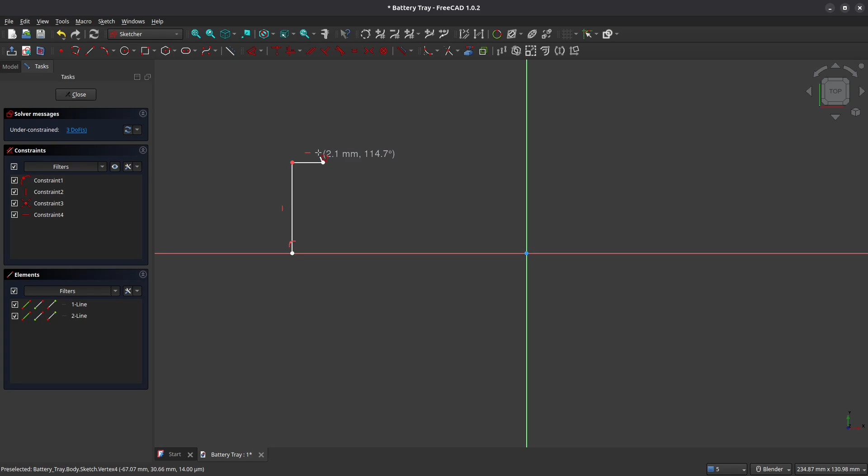Begin by creating a new body and a new sketch on the XY plane. And we're going to use the polyline tool, and we're going to map out one half of our tray just like we did in the previous episode. Now, this is going to have 4 tabs that we're building into this. The 4th tab is actually the retention ledge that will keep the battery from slipping out of the tray on one side.

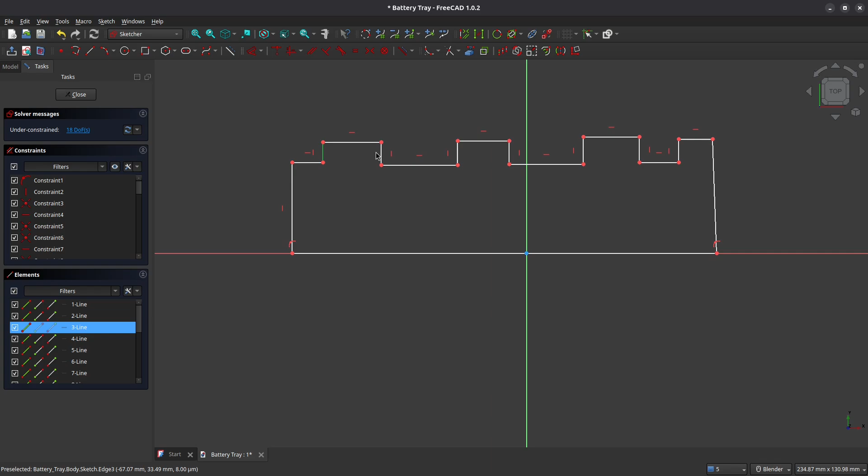As before, we're going to need to make sure that if any of our line segments weren't horizontally or vertically constrained, that we select them and we constrain them. There's another one there. Now let's set the height of the vertical edges on our tabs so that they're all the same, equal length. This one also needs to be constrained vertically. Now let's set the width of our tabs so that they're the same.

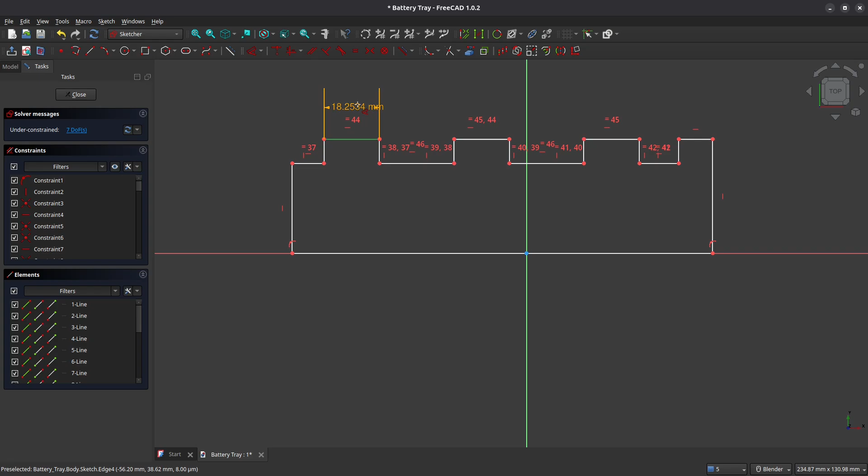The section between these 2 tabs is also going to be set equal. And now let's set the width of the tabs to 10mm. Let's set the height of the tabs to 3mm. Now this gives us a bit of a sense of scale of what this is going to look like. Let's set the distance here between our tabs to 22mm.

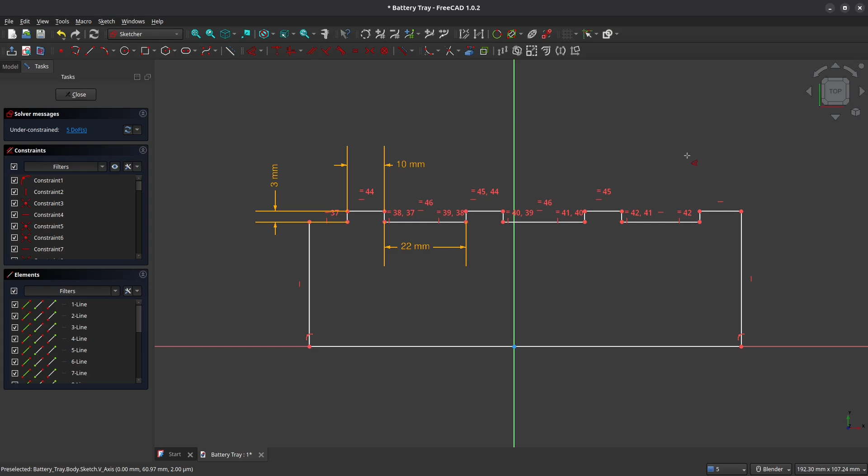I'm going to pull this out to about right here, and I'm going to pull this sidewall in here. And I'm going to set the width of this top tab here. This one is 9.8mm. I'm going to pull it in just a little bit like this. And now I'm going to set this bottom line so it is symmetric around the y-axis. And now I'm going to set the length of that line to 104mm.

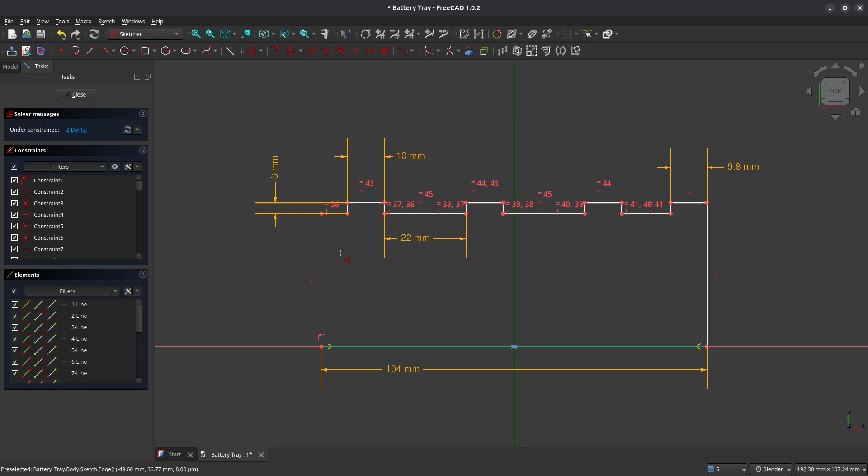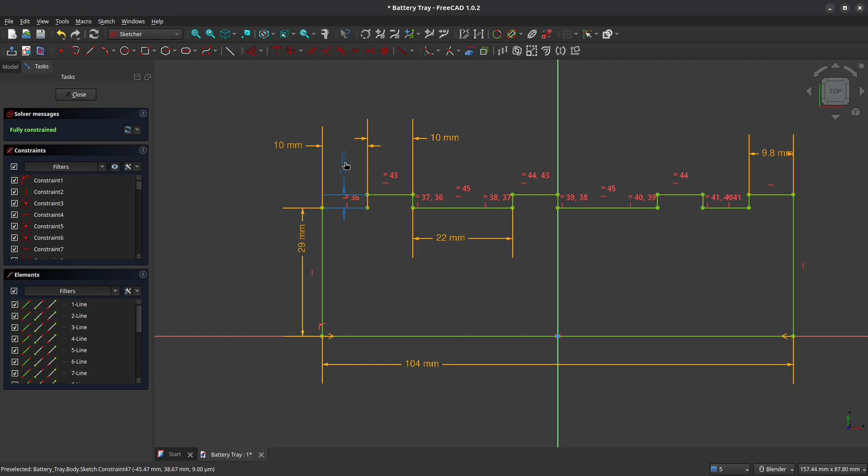Going to set the sidewall here to 29mm. And now we need to set the length of this edge right here. We're going to set this one to 10mm. Just make sure that we can see all of these constraints. And with that, we have fully constrained the outer shape here for our tray. So now we're going to close out of the Sketcher workbench, and we're going to pad this shape out. And we're going to pad that to 3mm.

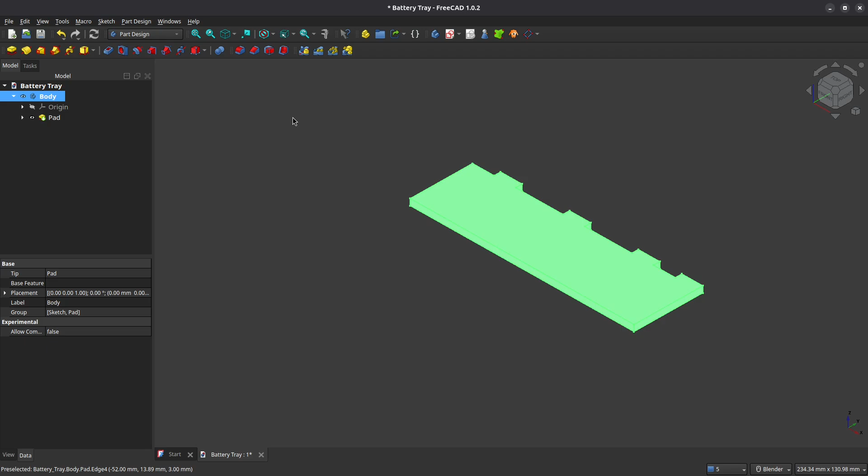And we're going to mirror this. So in the tree view, left click on the body, and we're going to mirror this shape. From the plane, we're going to select our own reference, and that's going to be this edge here. And we'll say OK. And now we're going to add the retention ledge on this side here. So let's create a new sketch on the top of our part here. And we're going to reference this edge and the inside parts of this tab.

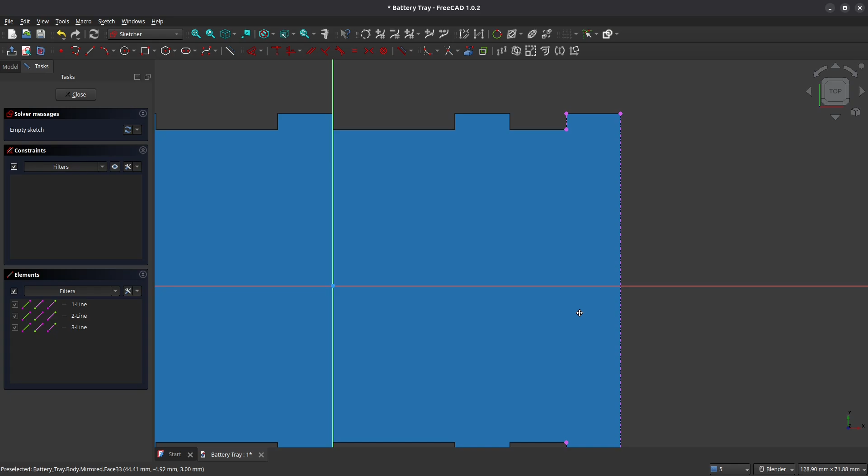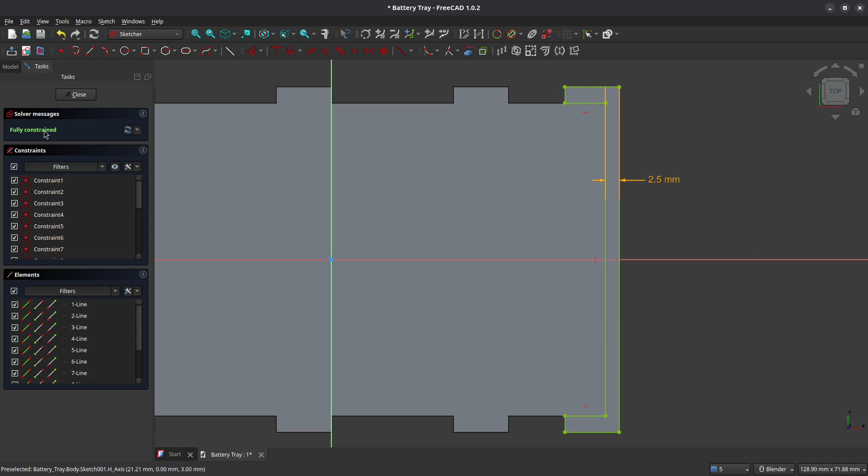And we're going to use the polyline tool. We're going to trace the outside, and then we're going to come back around the inside. And we're going to make sure that we've got our horizontal and vertical constraints in place, which we do. We're going to set this sidewall of our retention to 2.5mm. So our sketch is fully constrained. We can close out of this, and we're going to pad this out to 5mm.

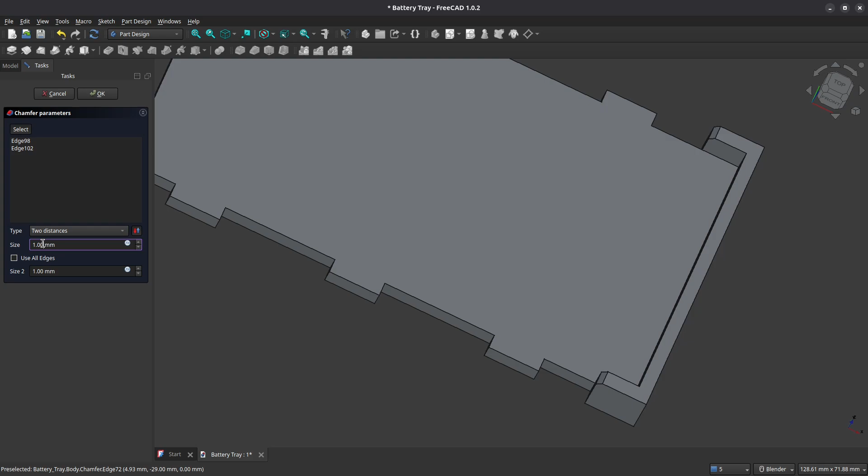And now we're going to add a chamfer on the edge here. So let's grab this edge here. I'm going to hold down Control, click the next edge, and grab that chamfer tool. We are going to choose the 2-distance type of chamfer. Our first size is going to be 7.3mm, and our second size is going to be 5mm. And when we do that, we get this nice even chamfer here. Extends from the edge downwards.

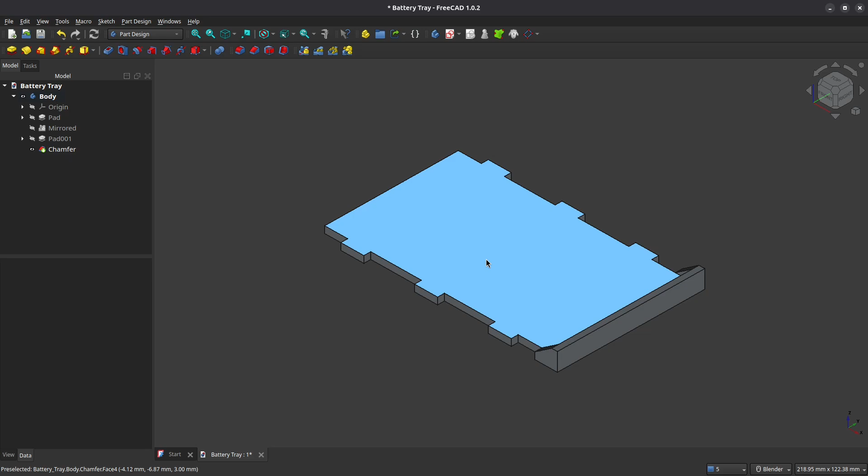All right, so now that we've got that, we're going to create the truss pattern here in the center. So let's create a new sketch on the top. Going to create our triangles using the polyline tool. And so just like before, we're creating these 4 triangles. And we're being symmetric in how we do this.

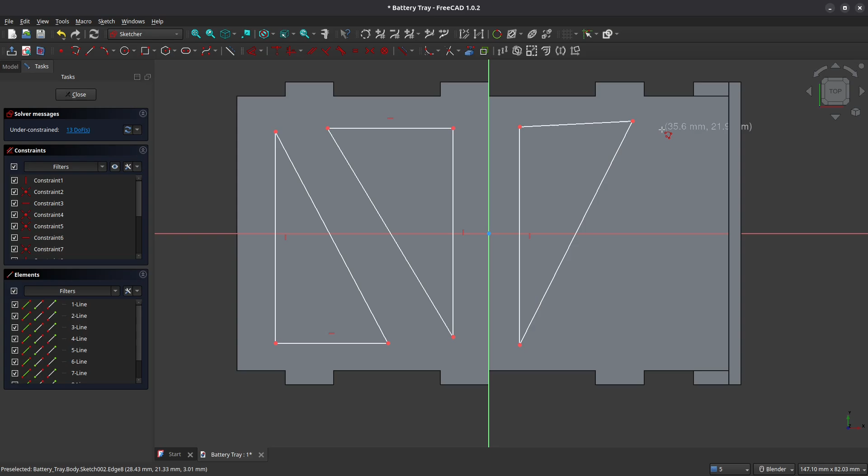We will take and fix any lines that aren't horizontally or vertically constrained here. So that one and that one are missing their constraints. So that solves that problem. Let's make these 2 inner triangles so they're symmetric around the y-axis. Let's take the base of all of our triangles and set them equal to each other.

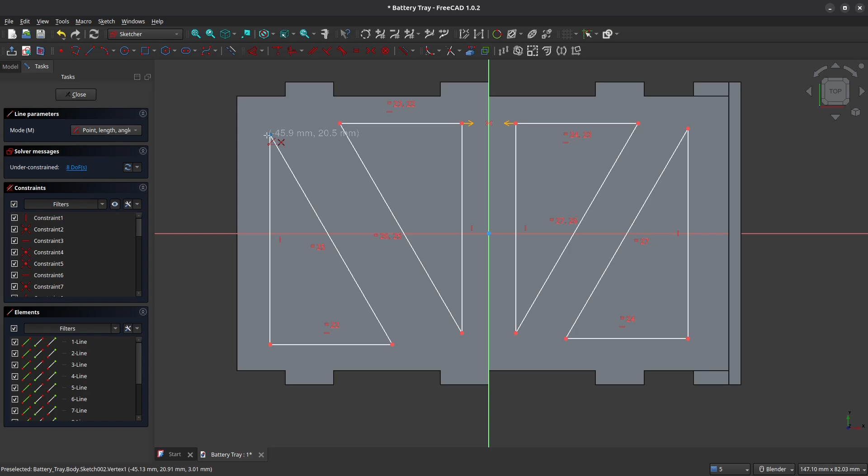And let's take the diagonal portions of our triangles and we'll set them so they're equal to each other. And now we're going to toggle on the construction geometry and we're going to draw construction lines between each of the triangles on the top. Finally, we're going to make sure that these 2 end construction lines are constrained horizontally. And we're going to click on each one of these construction lines and make them equal in length to each other. So now we can set the length of one of the construction lines to 5 millimeters.

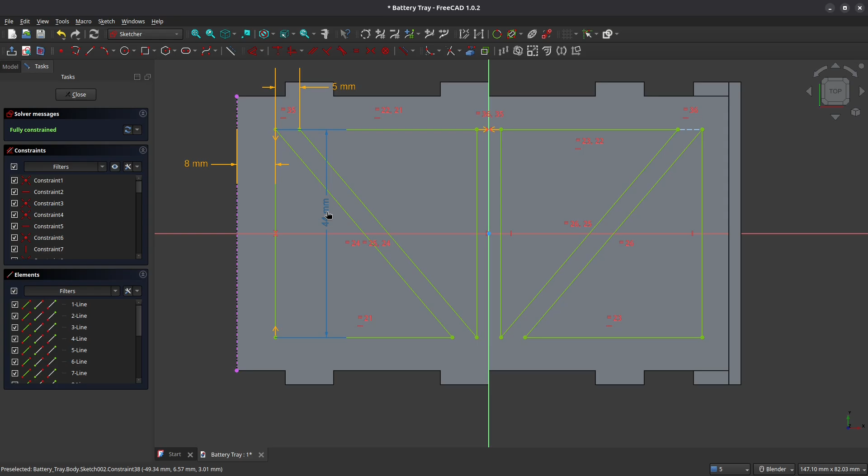We're going to set the height of the sidewall of this triangle here to 44 millimeters. And we're going to make this triangle on the end, we're going to make its vertical line symmetric around the x-axis. And that leaves us with 1 degree of freedom here, and that is going to be the distance away from the edge here. So I'm going to grab my external geometry tool, reference that side edge there, and I'm going to create an offset here of 8 millimeters. So our truss pattern is fully constrained now, so I can close out of that and pocket it.

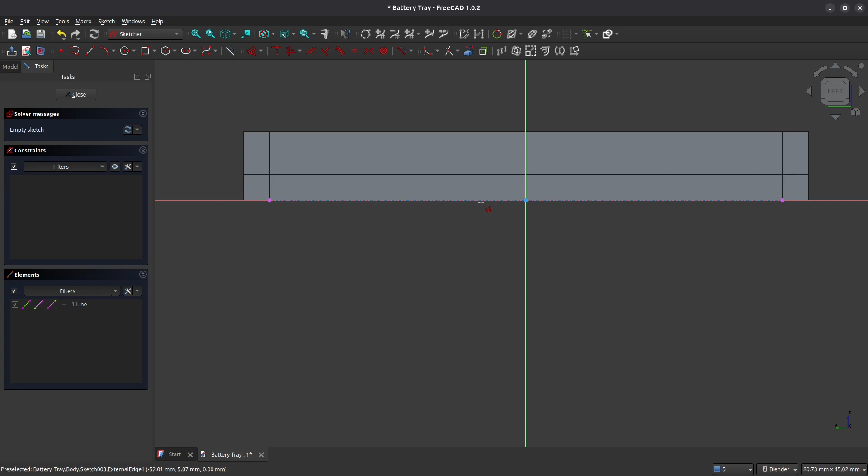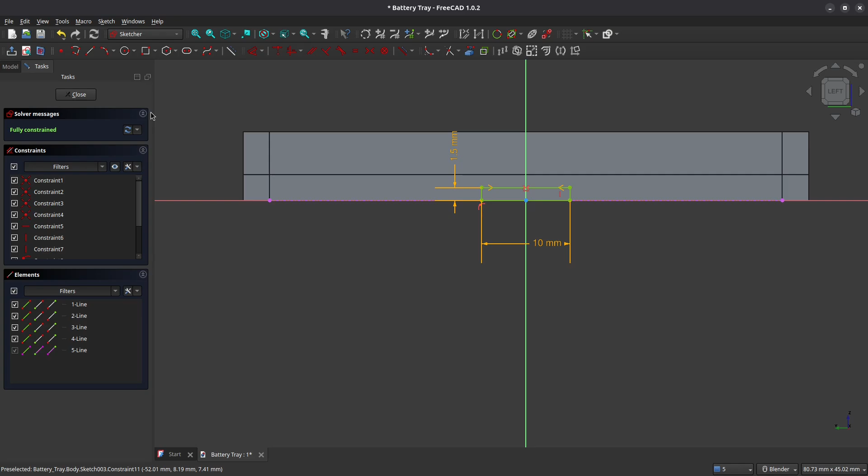And now we're going to rotate around to the front, and we're going to add a shape on the front here. This is going to be the compliant clip that will flex just using the natural flexibility of PLA plastic. So let's put that in there. We're going to make this rectangle symmetric around the y-axis. And we're going to set its width to 10 millimeters. And we'll set its height to 1.5 millimeters. So there we are. So that is going to be our base shape for our clip. So we'll close out of this and we'll pad that out and we'll accept the 10 millimeter default.

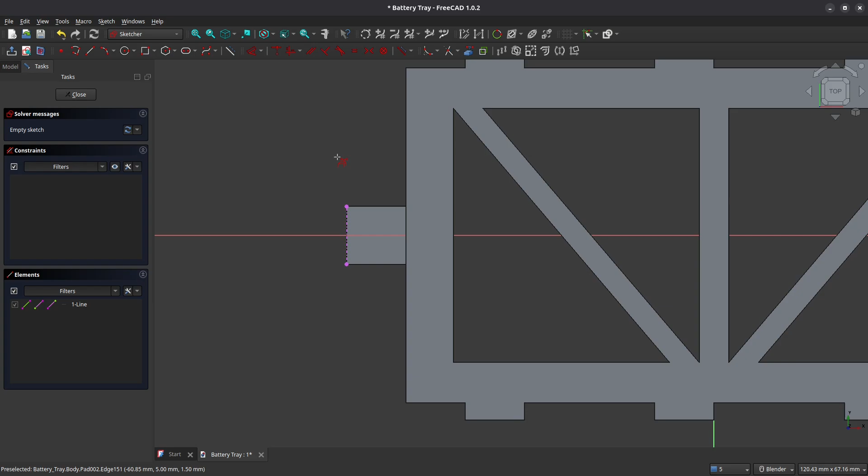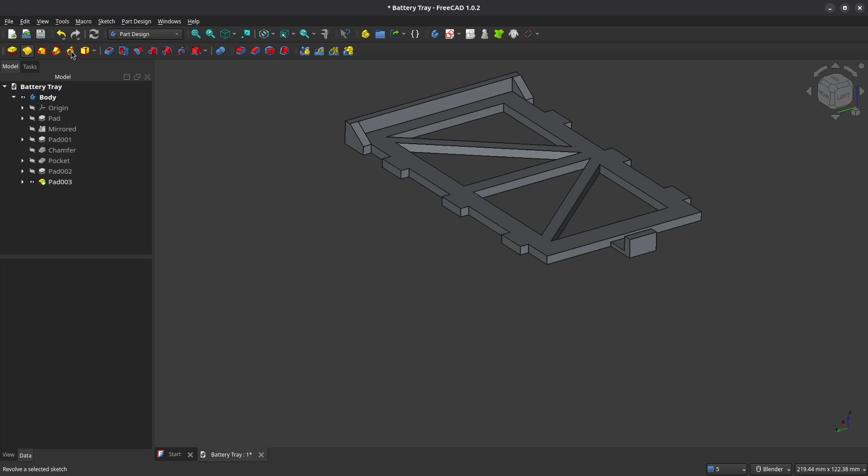Let's click on the top of the clip that we've created, and now we need to create the actual clip portion that will restrict the movement of the battery once it's in the tray. So we're going to reference that edge there, grab the rectangle tool, and we're going to grab these 2 vertices here and constrain them coincident. And we're going to set this to a width of 2.8 millimeters. And so we can close out of the Sketcher workbench now, and we're going to pad that out to 5 millimeters. Now our clip is going to be right here.

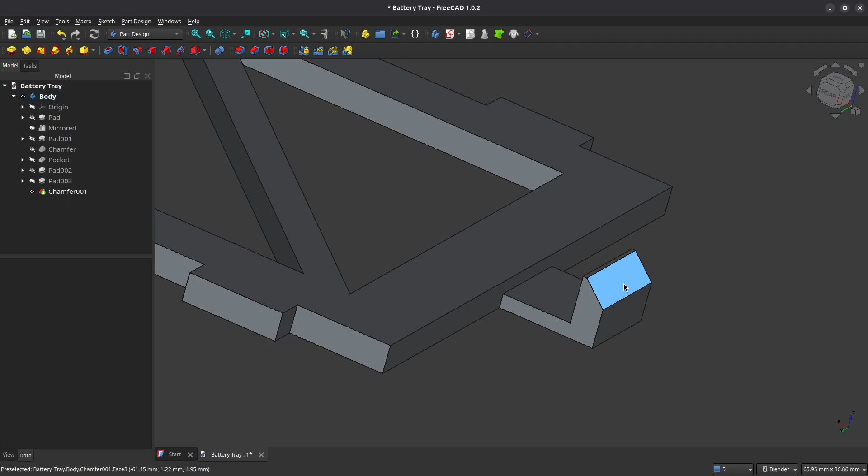We want to make it so that the battery can push over the clip. So we're going to grab this edge here, and we're going to give it a chamfer. And we're going to set that chamfer to 2.4 millimeters. So when we look at it, we can see that we don't want too sharp of a corner here. It's just going to get broken off anyways by the battery as the battery slides back and forth. So that is a useful profile there.

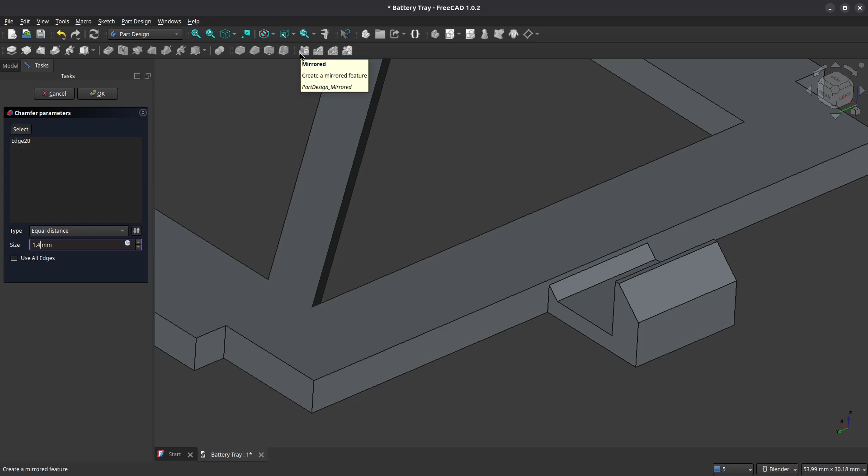Now that we've got that, we need to increase the strength of the joint here where the clip connects to the edge of our tray. So the easiest way to do that, left click on that line there, and we're going to create a chamfer there, and we're going to set this value to 1.4 millimeters. And you can see that we now have this reinforced area, which will keep the clip from breaking off of the tray that we've created here. That pretty much does it for the tray.

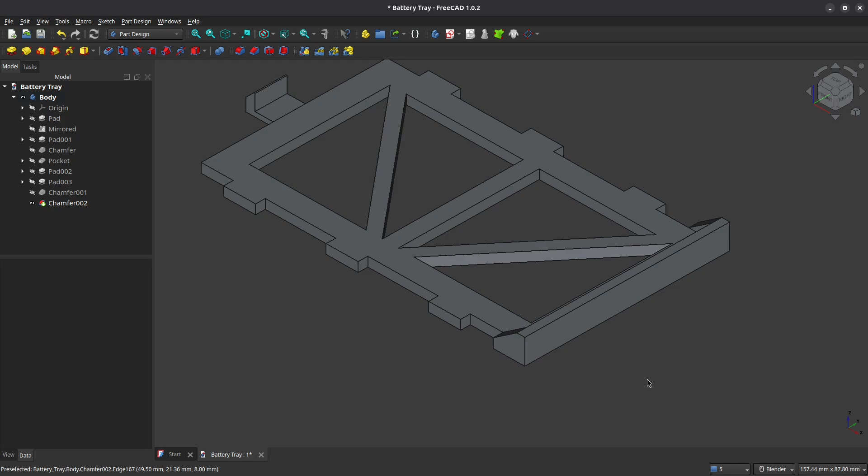We're just going to add a cosmetic chamfer at the back of the tray here. So I'm going to grab these 2 edges here, and I'm going to give it a chamfer of 3 millimeters. So with that now, I have completed the tray. We have fully completed now then a battery box that will secure the battery on the top of the Sparkbot.

In the next video, we're moving back to the front of the Sparkbot to tackle its ability to detect obstacles in front of it. We're going to engineer a mounting bracket for our HC-SR04 ultrasonic sensor, and we'll anchor this bracket directly to the mobility base. So you'll also see exactly why we created that specific clearance notch in our accessory deck in part 2. It's all about system level planning.

And we're also going to model a small shim that's going to go under the metal bracket that attaches the TT gearboxes to our base. We need to increase the height of our motors off that base by 1 millimeter, and so we're going to put both of those parts into the next video.